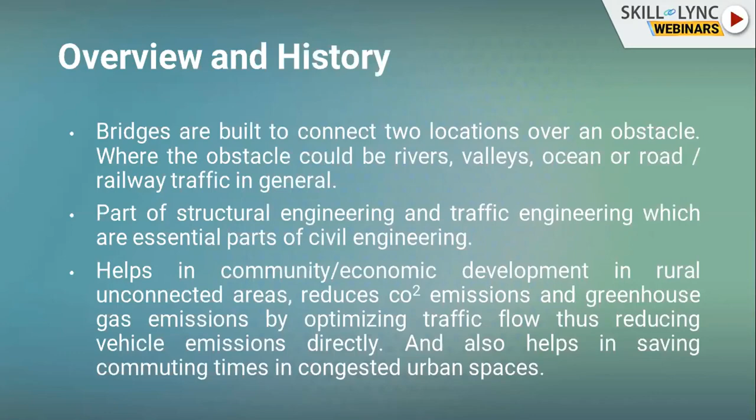And we also help in the development of the economy and community. You can see quite a lot of NGOs are involved in bridge engineering, in Africa especially, and also in South America. There is Engineers Without Borders and also Bridges to Prosperity. These NGOs are helping connect rural communities across rivers which become inaccessible for half a year or one-fourth of a year, and the people have to move a really long way around to get connected to the rest of their communities.

Coming back to bridges, the oldest form of bridges are flexural or beam type bridges. Timber logs or stones were just laid over the obstacle, like a small stream of water, since prehistoric times, just to cross them. That can be considered the start of bridges. After that, detailed design came in as arches came in. Romans started developing arches very early. There are Roman aqueducts dated to the 3rd century BC. An aqueduct carries water from one point to their cities, and that has been done since the 3rd century BC.

Other than that, we can see rope bridges, or cable bridges, that have existed since very old times in Asia and also in rural South America. Similarly, bridges with arches are also very effective in carrying aqueducts. With the advent of technology, new bridges also came into effect, like cast iron, which came in around industrialization, around 300 years ago. We can also see steel bridges over the last century, and quite a lot of RC bridges, reinforced concrete bridges, pre-stressed bridges, and in the current scenario a lot of FRP bridges, fiber reinforced polymers.

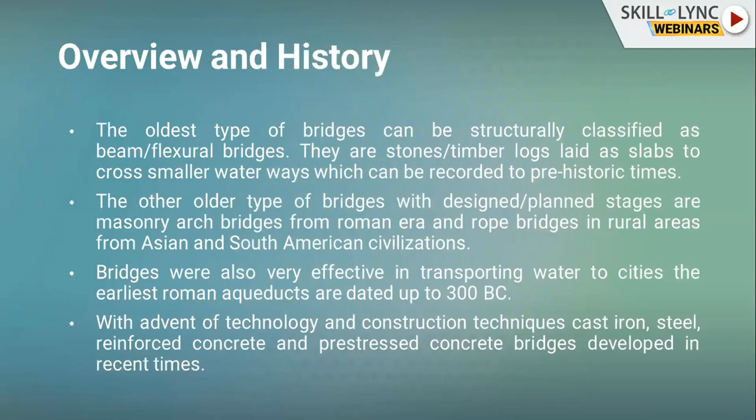Here you can see the types of bridges I have mentioned. These are old Roman aqueducts that have been here for at least 2000 years. Similarly, we can see the root bridges in the northeastern part of India. The one on the right is the Millennium Bridge. It's a suspension cable bridge, but it's very futuristic, and it is in the heart of London.

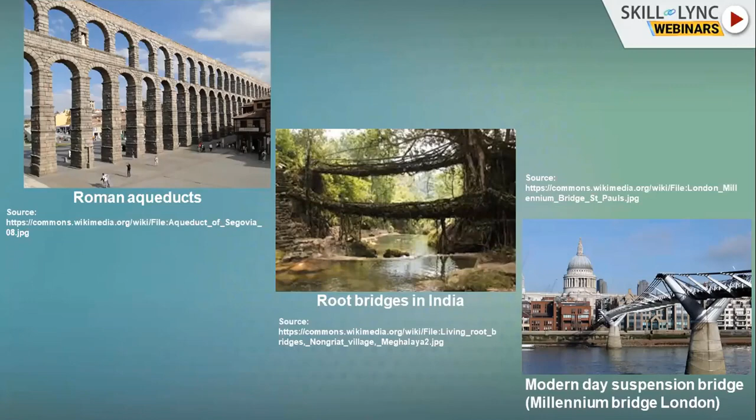Next, coming to the types of bridges, bridges can be classified based on materials, their behavior, and their purpose. Materials is pretty basic: what materials they are built of. It could be a steel bridge, a concrete bridge, or an FRP bridge. Within steel there are quite a lot of other types of steel bridges, and similarly with concrete, based on the mechanism, there are pre-stressed or reinforced bridges. Coming to behavior, based on the principle of compression, arch bridges behave that way. They completely transfer forces through compression.

On flexure, you can see slab bridges, beam or girder bridges, and also cantilever bridges. So they behave on the principle of bending and shear, basically. And the third type would be tension bridges. The main mechanism in which they transfer their forces would be through tension that occurs in their cables. That could be through cable-stayed bridges or suspension cable bridges.

And the last type would be truss bridges. I hope most of you would be civil engineers, so you would know what a truss is. It generally is members that are completely released against bending. So it doesn't take any bending; it generally takes axial forces, either tension or compression. That's how a truss generally works.

And then coming to the purpose, it could be a footbridge, a railway bridge, a road bridge, or an aqueduct. There are also quite a lot of other types, where it could be used for utility bridges as well. So basically, these are the types of bridges which we could see.

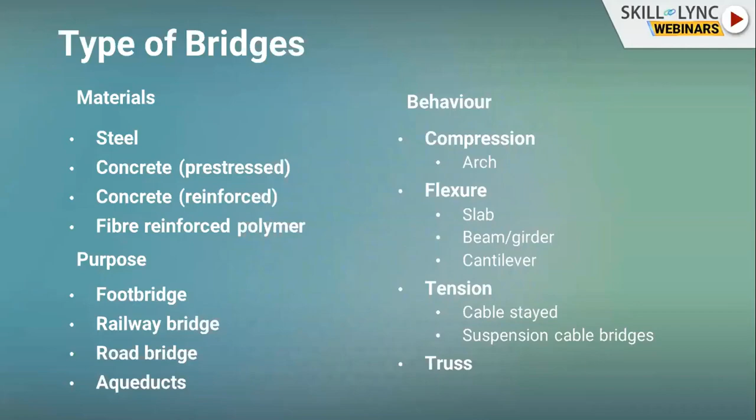For fixing the bridges, it's quite interdisciplinary work. So you can say that the conceptual design of the bridge is an iterative process. It comes from interacting with various departments. So basically, a bridge is decided upon based on four things, as I have mentioned over here on the right. One is the purpose, the other one is the cost, then the aesthetics and the surrounding conditions.

So the purpose of the bridge: it is required for connecting two points across a river, if you want to make an interchange over a highway, or if you want to cross an existing railway track. So these are the purposes for which the bridge is built. Generally, the purpose is also not completely dependent on bridge engineers, that is, the structural engineers. There could be highway engineers who decide upon the level at which the road has to run. And similarly, if it is a railway bridge, it is dependent on the railway authority as well.

And similarly, it's dependent on engineering teams to decide upon the span of the bridge and where they are located. And similarly with a hydraulic engineer, if it's a navigable canal, it is also dependent on the waterways: what clearance should be allowed, what the intermediate spans are, and where the piers should be placed, etc. So these things are decided upon based on the purpose of the bridge.

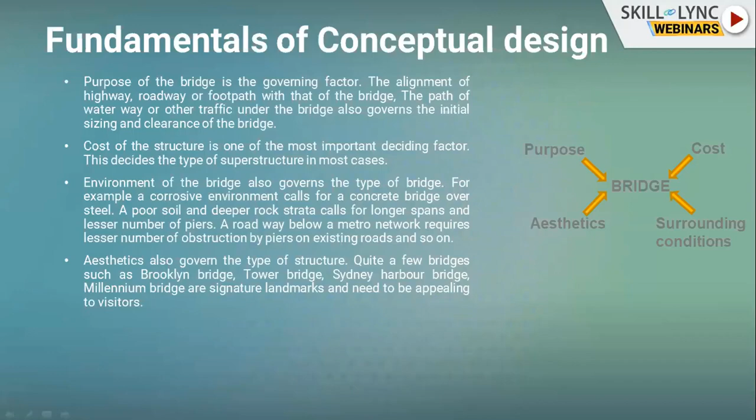So coming to the case of detailed design. People would think there are quite a lot of methods by which we design for the forces. It could be based on various mechanisms, as we have discussed earlier. It could be through compression, through a truss, or through other phenomena such as flexure. So people think it's pretty complex, that every force comes through differently, and we have to learn individual methods, and that is very important.

Of course, it is important, but coming to the basics, they basically come from Newton's laws of motion. So basically, we try to find out what forces are acting in the bridge through this. Every force has an equal and opposite reaction. So we tend to find out the reactions, and that's how we equate the forces. That is the first basic which we use for structural analysis.

Let it be an indeterminate structure or a determinate structure, this is the first thing that we apply over any stable structure to find the equilibrium. Let it be a truss, or the detailed design case, we tend to find the equilibrium. And this equilibrium is applied through various methods, either finite element methods, stiffness matrix methods, or even simple analysis for a determinate structure.

The second case would be how we find the forces. Basically everyone knows force is equal to mass into acceleration. So let it be braking or centrifugal forces, and for dead loads we put gravitational acceleration with the mass, based on the various densities of materials. That's how we find the forces. So that's how we come across statics, where we find the forces acting on the structure.

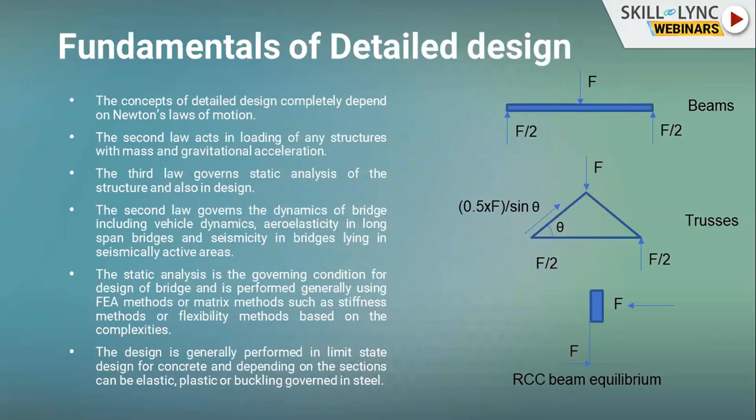Coming to the design process, the first thing will be geometry selection. I think I have already covered this point pretty much. So the selection of the geometry and the material used is the first step in the design. Basically we find out what kind of geometry we are going for, either an arch or a cable-stayed bridge, and what kind of materials we are using for it. And they are pretty much interdependent in quite a few cases.

For instance, if it's a tension based design, like a cable stay bridge or a suspension cable bridge, we generally go for steel in this kind of design. So they're pretty much interdependent. The span, as I have mentioned earlier, is not only the work of a structural engineer, but it's also dependent on the other fields of engineering.

As I have mentioned earlier, it could be due to the clearance of railways. So if you have two tracks running under the bridge, then we have a fixed clearance, 10 feet for one track, and mostly 20 feet or more than that. It depends on country to country. And similarly, if it's a highway, it depends on the transport engineer, whether we can place a pier in between the highway, or they want a continuous span. So that's what I have mentioned in the next point as well.

Transportation slash traffic engineers decide on the alignment of the bridge as well. So it's not only what is happening under the bridge, even on the bridge there could be certain curves, vertical curves, horizontal curves, how the traffic moves on the bridge. That is also dependent on the transportation engineers in this case.

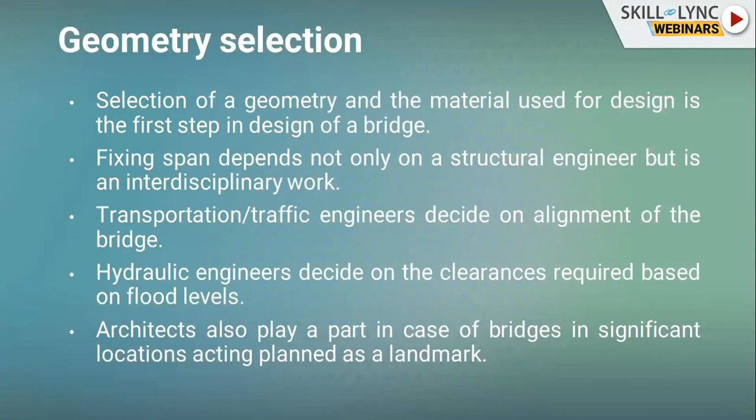So the first basic thing when we go for detailed design will be the evaluation of the permanent loads. It is very dependent not only on permanent loads, it is very dependent on the vehicle loads as well, because the amount of permanent load required is directly proportional to the amount of vehicle load that will be acting on the bridge. So in quite long span bridges, it can be noted that the materials used are pretty much used to carry their own weight. That is the basic thing.

Superimposed dead loads, they can vary. For instance, we have a wearing course. In certain cases, we have handrails if it's a pedestrian bridge, or we have vehicle restraint systems in case of a highway bridge. And in case of railway loads, we have to also look into other cases such as ballast, or in certain cases it could be derailment. So those kind of forces also happen in permanent loads. But SIDL, that causes the ballast load, will be coming into your permanent load.

Another very important part would be the earth pressure. Quite a few bridges which you will be seeing, you might not even notice that these bridges are there, are culverts or integral bridges. These are very short span bridges, it could be up to 5 meters or 2 meters, etc. But these bridges are made as integral bridges. So what happens with them is that the earth pressure forms a pretty significant load on them.

If it's a long span bridge, earth pressure acts only on the substructure. It doesn't much affect the superstructure. But in these kind of shorter span structures, they also form a significant part of the superstructure design. In certain cases, they act beneficial to our design because they induce compression on the slab or the girder in integral bridges. So this earth pressure provides additional compression, which helps the design. Compression generally tends to increase the bending capacity of the structure up to a particular limit. So in that case, they are pretty useful. So we also estimate them in permanent load evaluation.

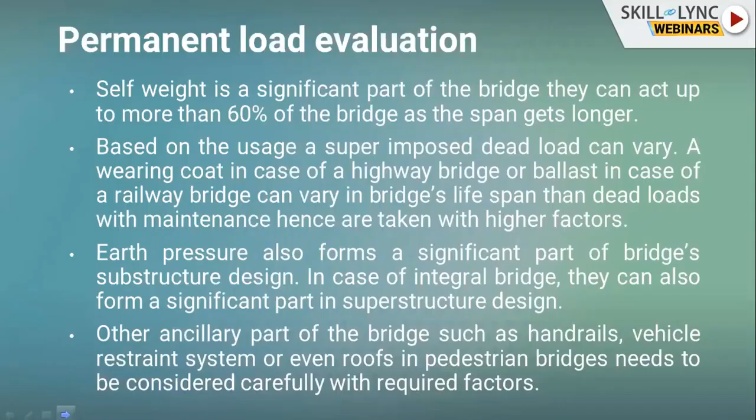Then we are coming to vehicle loads. So vehicle loads are pretty important. This is what makes bridge engineering pretty complex, and somewhat pretty interesting, because in other kinds of structures we tend to take static loads. They are located in the same place over the period of time. Even though they have changes, it doesn't make much of a difference.

But vehicle loads form a significant part of the bridge, which are located in different locations at different points of time. So the analysis of vehicle loads is done using vehicle load analysis, moving load analysis, or also using influence surface diagrams. So if an engineer is pretty competent about which part of the structure he has to give the reinforcements, then he uses the influence surface diagram analysis, because they know that 1/4 of the bridge needs to be designed, half of the bridge needs to be designed, or across the slab, these are the locations which are critical. So if I take influence lines for these locations and give those reinforcements or give that strength of steel in other parts of the bridge, then it is pretty good. So that's how vehicle loads are taken for design.

Other thing is the moving load analysis. When people are somewhat not sure which part of the bridge incurs the significant major forces, then we also tend to go for moving load analysis. So simple vehicle load analysis, where the vehicle is placed at each and every point of the bridge, and the forces are taken for the maximum envelopes. We call it the envelopes.

When the vehicle is located at the start of the bridge, we would have a force at a particular point in the bridge. When the vehicle is placed at the end of the bridge, we will have a particular force at the bridge, and we make an envelope of maximum forces for each location. So we design the bridges for these envelopes. The same envelopes are also applied in influence lines, but we know those locations. So influence lines can be very helpful in case you are pretty familiar with which part of the bridge you are going to be using for design, or if you're not familiar with it, the moving load analysis is pretty helpful.